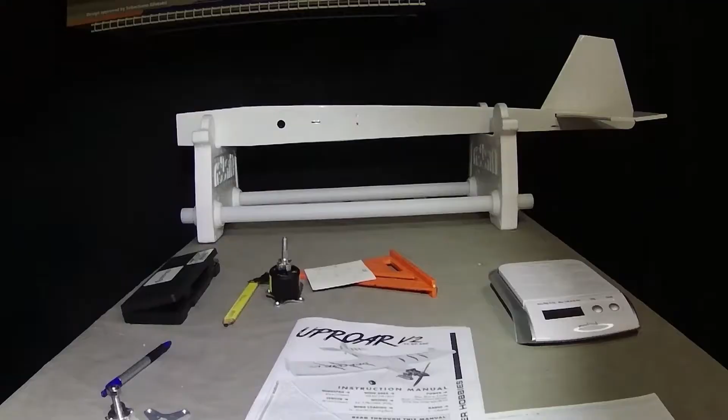Alrighty there guys, it is time to install the brushless motor for our Uproar version 2.

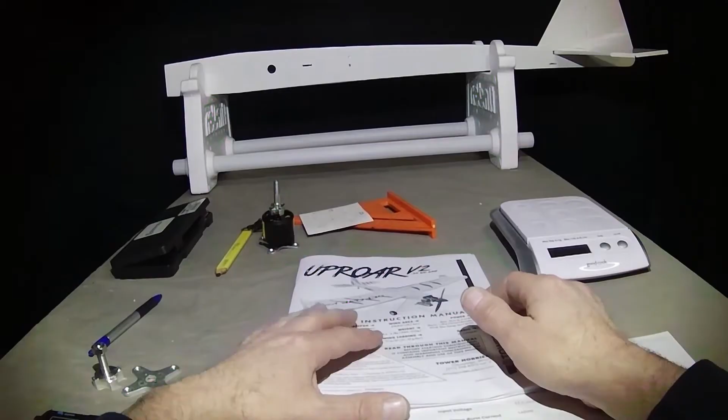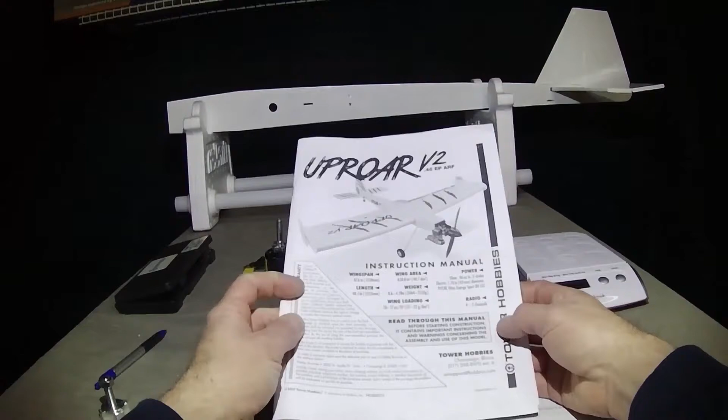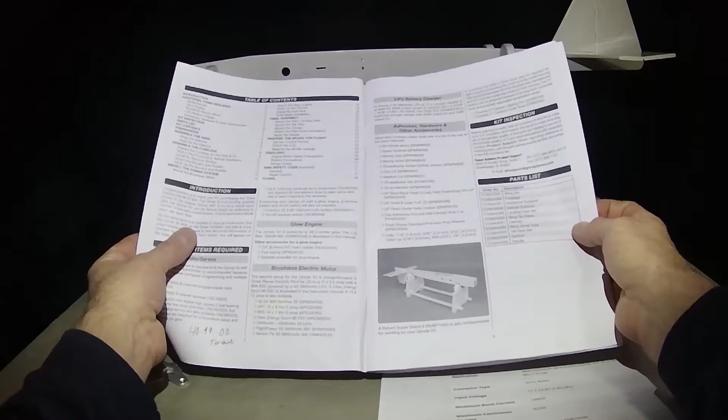Now, to help you guys select your brushless motor, this is how I did it my very first time. I was clueless, I didn't know what to do. I spent who knows how long trying to figure things out. In the manual, it'll give you a recommendation, and of course they're going to recommend their own product, and it's most likely going to cost more money than what it really should, unless that's just what you want to do. But they recommend this right here.

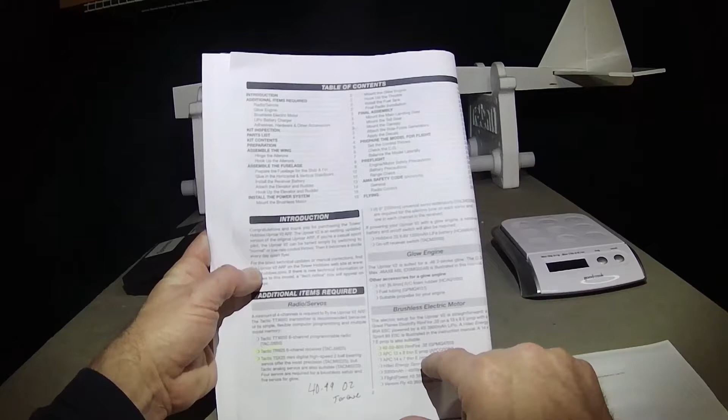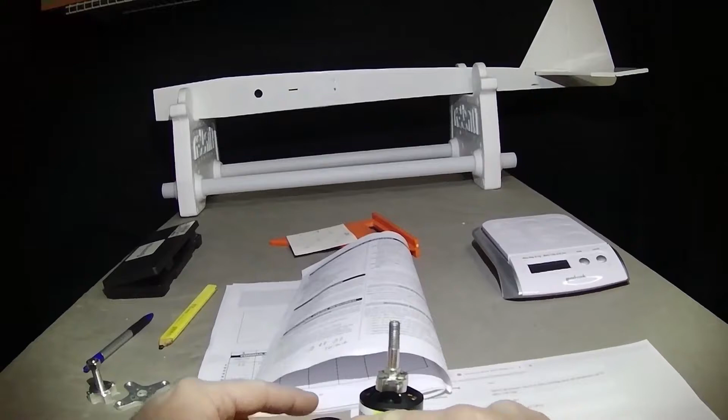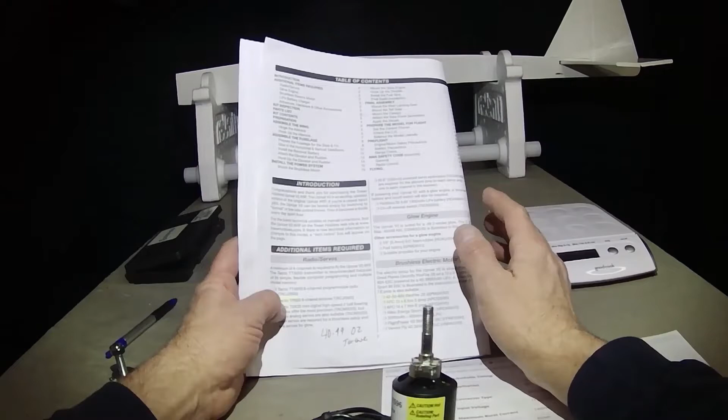A 4250 800 rimfire 0.32 brushless outrunner motor, and it gives a part number. The 4250 is the size of the motor - that's 42 millimeters wide and 50 millimeters tall. So whenever you hear somebody say they have a 3240 or a 4020 or whatever, a 5050, they're talking about the size of the motor.

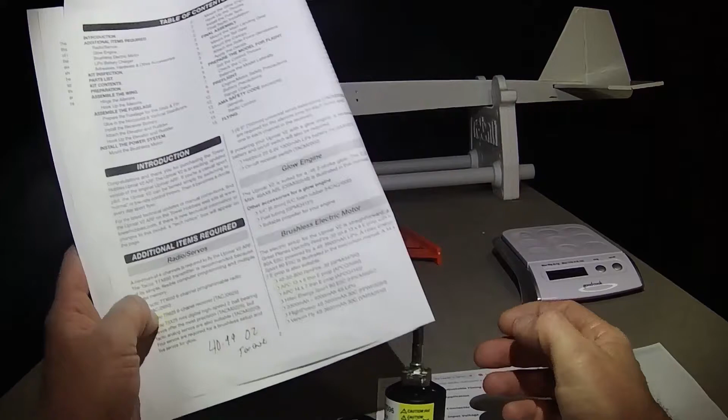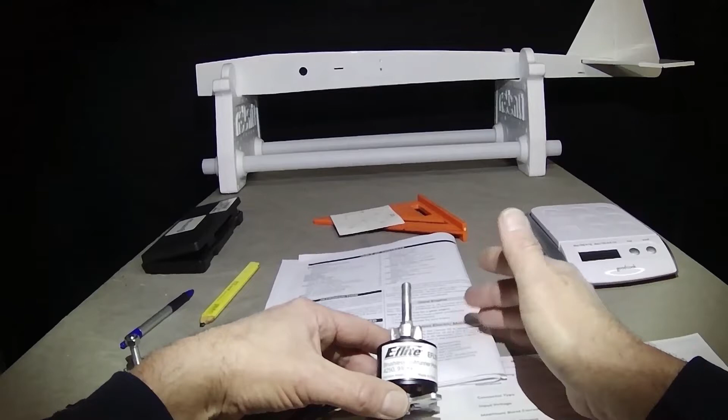So 4250 800 kV, that stands for RPMs per volt. The exact mathematical formula I couldn't tell you, but for simple terms let's just call it 800 RPMs, and they recommend a 4S battery, which is 14.8 volts. So you could multiply the 14.8 by the 800 and come up with this. Or if you're going to use a 3S battery at 11.1 volts, you could do the 11.1 times the 800. But that's not the exact formula, it can give you an idea how fast the propeller will spin on what battery. Obviously, the bigger battery, it'll spin faster.

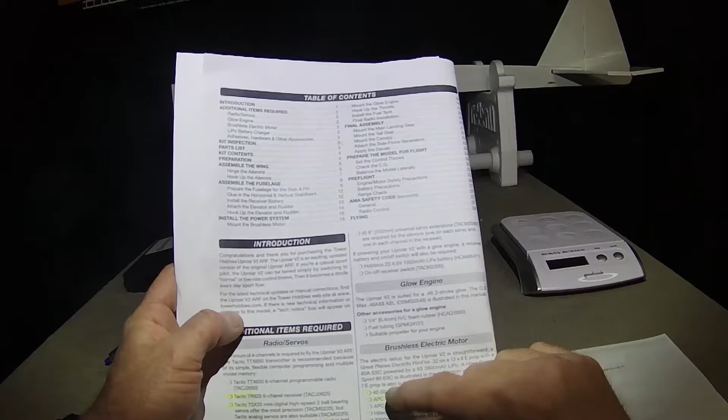So they recommend 4250 800, and they also call that a 0.32 size. I'm not all that familiar with engines that ran on nitro or glow, but the size engine would be, you know, they had a 30 size or a 40 size or a 60 size engine. So this motor is equivalent to a 0.32 size glow engine.

And then they recommend a 13 by 8 propeller to a 14 by 7. If you were using the 11.1 volt battery, you would go with the bigger propeller, because if you use the 4S battery, it's going to spin much faster, so you would go down a size in propeller.

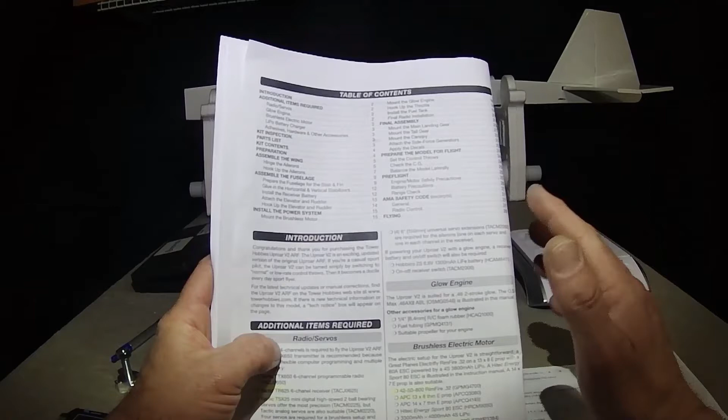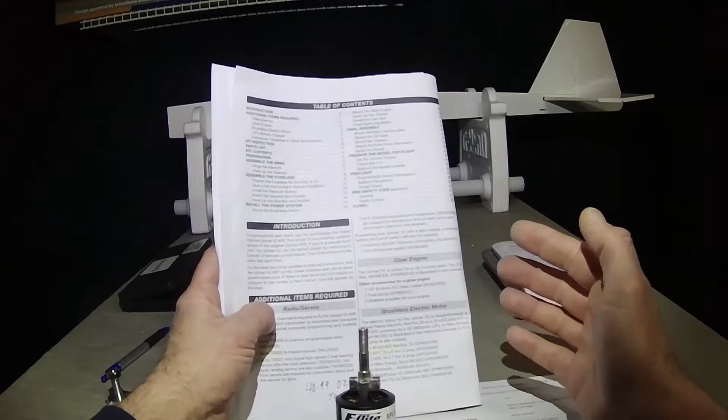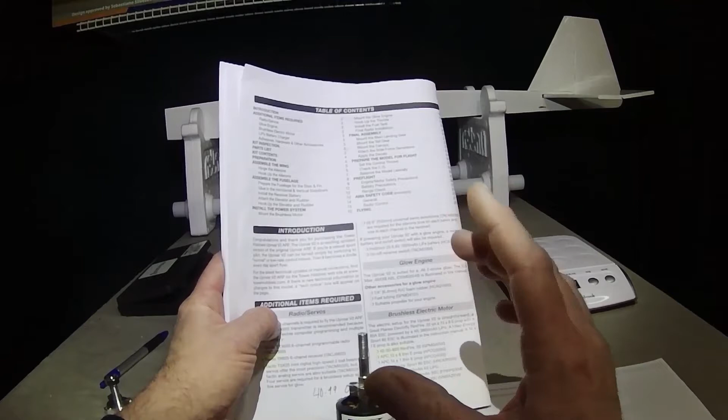You got to kind of think of tires on a car or your bicycle or lawnmower, whatever, how fast they're turning. If you're going 2 miles an hour, is the wheel just turning like this? And the faster you're going, you got to kind of think about your power in that rate. If you have a 3S battery spinning the propeller this big, and then you put a 4S battery, the 14.8 volt, it spins so much faster, it doesn't need to spin that big of a propeller still - it can go down a size of the propeller and still have more. It might take you a little bit to kind of learn all that. It did me too.

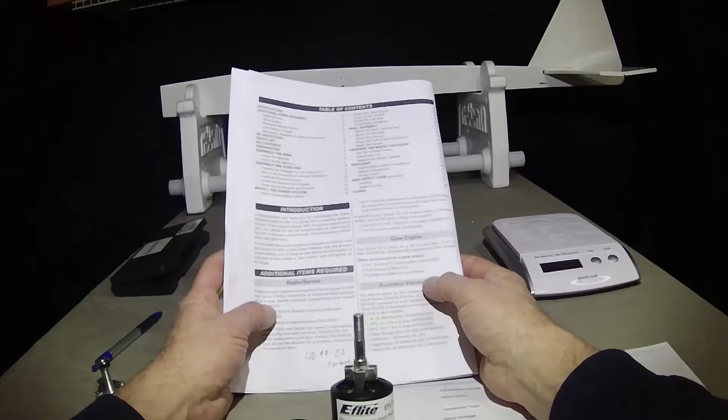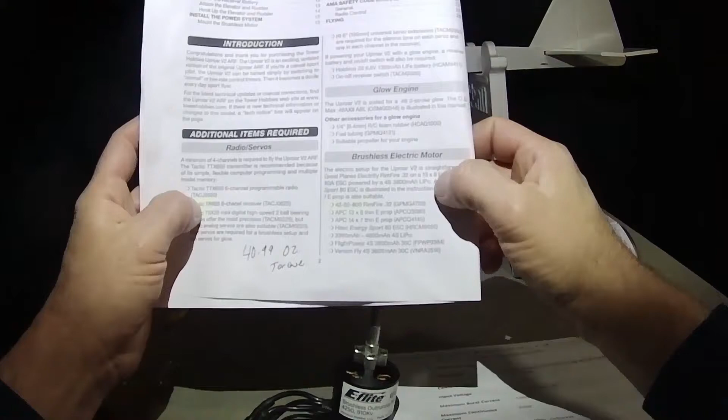It doesn't make sense to go that way, but if you go with the bigger battery, go down a size in a propeller. So that's what they recommend, 4250, 800. So what is that? Well, then you can go to a website and you can try to find that motor.

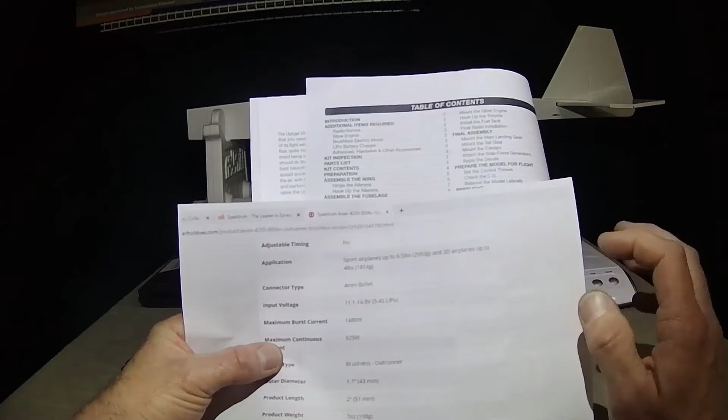And that'll teach you the size if you didn't just catch it right now. But you can see here, product length, 51 millimeters. Product diameter, 43 millimeters. Remember, they said 4250. So they rounded down by 1 millimeter in the instruction manual. And that's common. This is a 4250, and it's probably 39 by 49 or something.

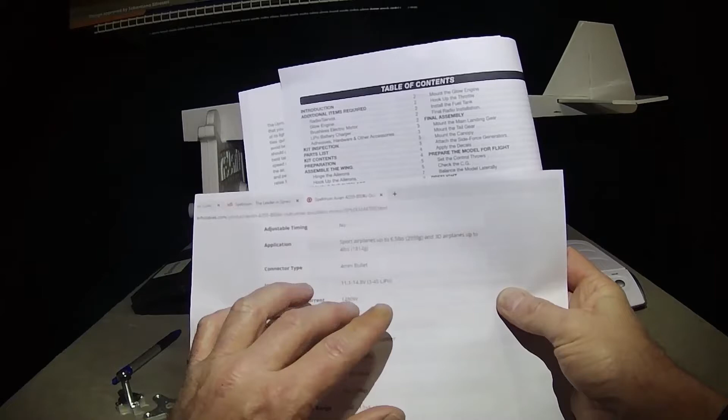And to give you an idea of how much the motor weighs, they're claiming it weighs 7 ounces. And if you want to figure out your watts and your max burst and your max voltage, you can use 11.1 to 14.8. It tells you what size connector goes on the wire, 4 millimeter bullet. When you're plugging your batteries up, you can think about the thickness of the wire.

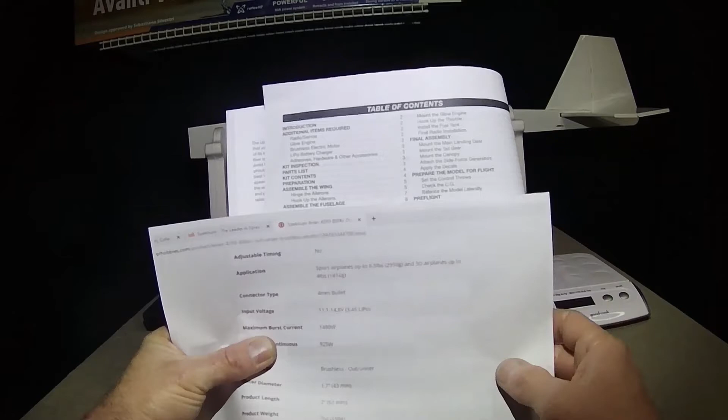And then the most important part here is it says the application: sport airplanes up to 6.5 pounds, 3D airplanes up to 4 pounds. So now that gives you an idea what this motor is capable of doing. The motor they recommended is this size, weighs this much, and is capable of flying a sport plane up to 6.5 pounds, or a 3D plane of 4 pounds. So now you have an idea what to shop for.

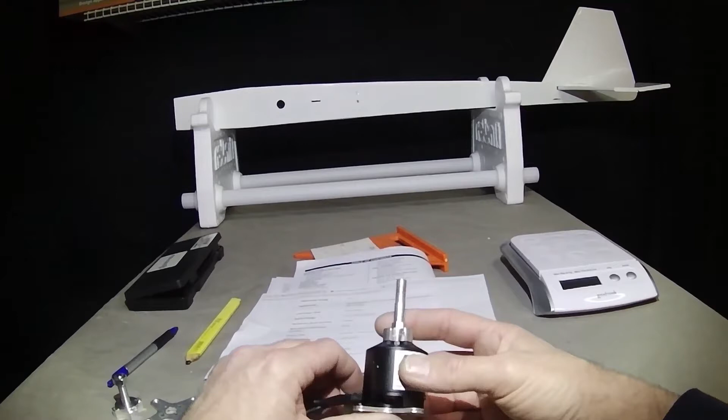I always talk about my 3D planes, and that's because I've had a few, so I end up with extra pieces. And this is a motor I've rebuilt, I replaced the bearings in it, so it's as good as new. It happens to be a 4250, but a 910 kV, so this motor is going to spin faster than the one recommended.

So what do you do when it's spinning faster? With voltage or by the kV of the motor, put a smaller propeller on it and get it down to where you need it to be. Well, they said their product weighs 7 ounces. So now we're shopping for a motor, right? Let's weigh this one and see what we come up with.

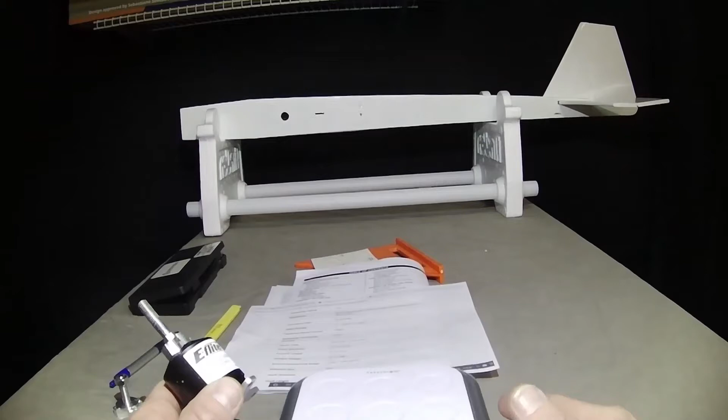Now this one's got the prop adapter, 4 bolts holding it on. It has the cross motor mount and 4 screws holding it on. So you got to take that out of this equation in your head. I'm going to hit the right button.

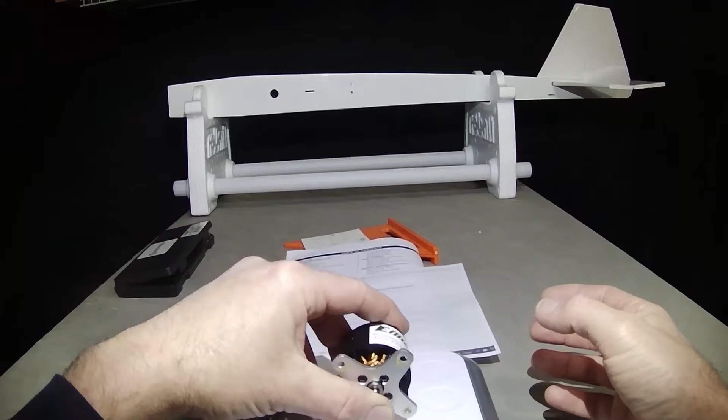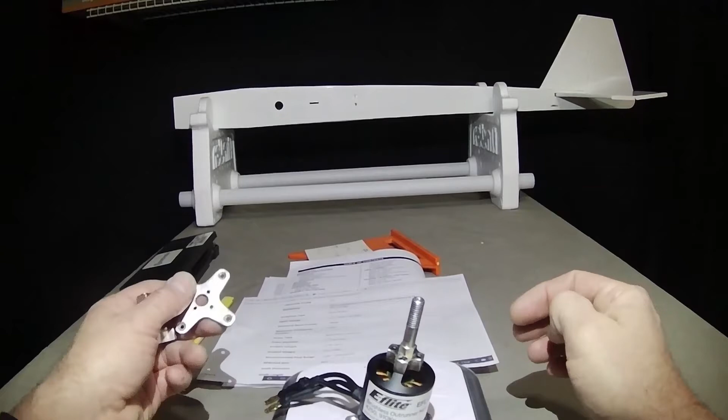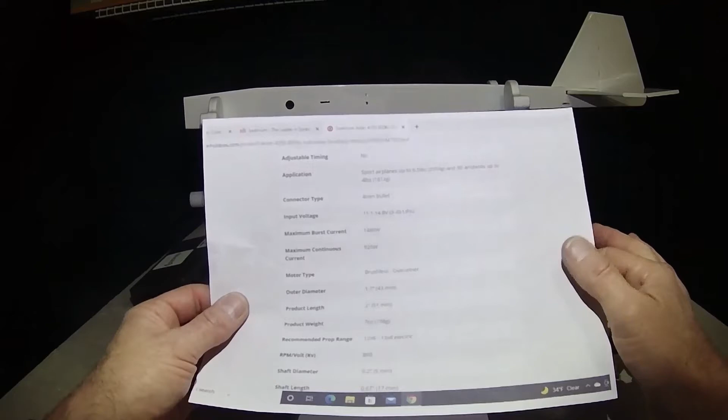9.7 ounces minus all this stuff. And here is a prop adapter and a mount, and that's 1 ounce. So we had 9.7 minus the 1 in my hand takes it to 8.7. These 8 screws are probably the 0.7. So our setup may weigh 1 ounce more. No big deal, we're within reason.

If the motor you chose or what you're shopping for came out to be 5 ounces heavier, then it's way too big. Or if it was 3 ounces light, it's way too small. So that can kind of give you an idea how you go about selecting a motor and shopping for it. Well, now that we got that out of the way, let's mount this thing and see how we do it.

All right, mounting the cross mount to the front of the plane. In the directions, it says to drill out the crosses they have right here.

Well, these are for the motor that they recommend, okay? So make sure the cross mount you are using either fits what they already have marked, or you need to make some new marks. The one we're using does not match those, so we're going to scribe a few lines in it and then figure out the center point for our cross.

The cross mounts, or the X marks the spots that they provided. If you bought their motor and their motor mount, they are centered. The mount we're using, the holes are just a little farther apart.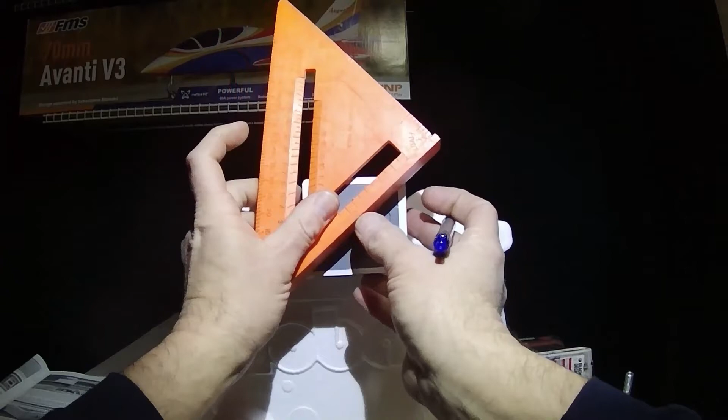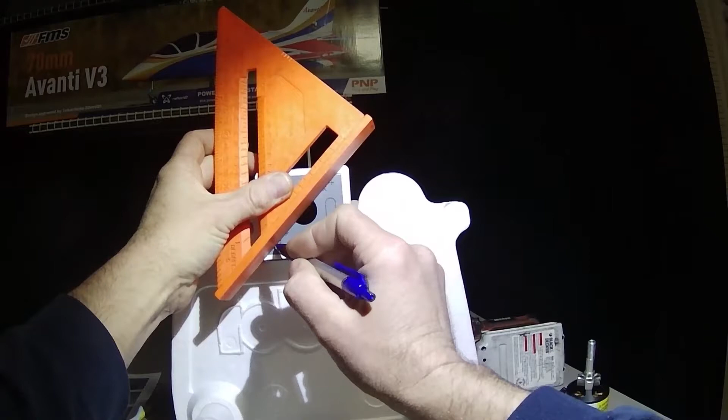So take a straight edge of some sort and a pen and try to make a line going right down. I might have to do this again off camera. Can you guys see that right there?

The mark they gave us is right here for electric. This one up top and this one up top is for the glow engine. And I think this one was for throttle linkage if you were using a glow engine, because you'd have a servo and a push rod coming out for the motor. But these inside holes are for the electric, and the bigger ones are for a glow.

We've only done one line so far, but maybe you can see how right there is where their X was, and then ours will go up. So we'll make another mark.

I'm trying to line it right up on what they got there. Concentrate, and you can see now we have a bigger X that we can try to look for our ink marker right through the center here. And then that'll center our markup. I'm just going to verify all this.

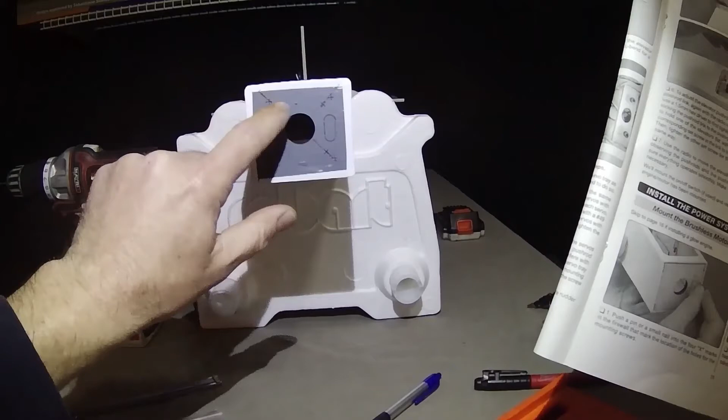I'll be right back. All right, off camera real quick, I fixed my light. I made sure these lines were perfectly straight and darkened them up a little bit. It was just a little easier without the camera dangling around my neck.

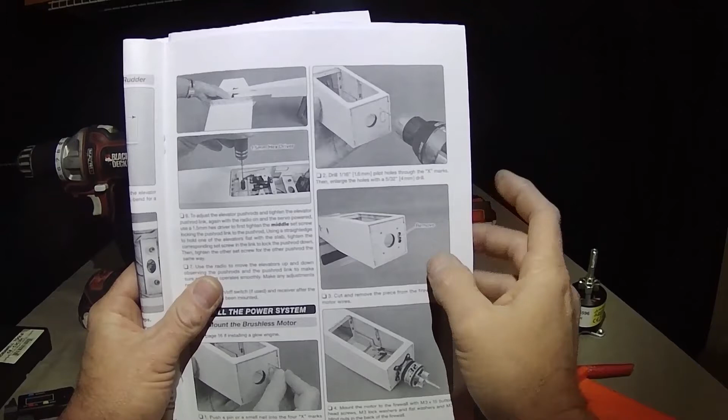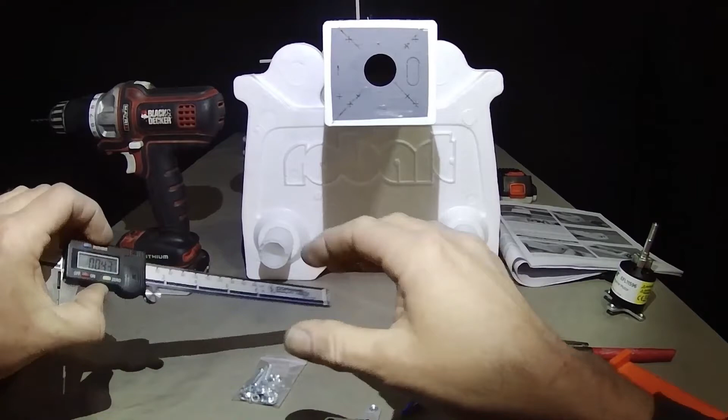In the instructions it says to drill the first hole, a 1/16 inch pilot hole through the X mark, then enlarge the hole to 5/32, because that's the size of the bolts they supplied. Now, drill bits do have the size stamped on them. You're going to need a magnifying glass or fantastic vision, normally right down the side, depending on the bit, but they will be stamped on there somewhere. Or if you have a micrometer, you can measure the bolt you're dealing with, and then try to match up a drill bit that way.

These micrometers aren't accurate unless you want to spend $1,000 on them. I mean, they'll be accurate to the hair, put it that way. But the bolt measures about 155, and it's accurate there. If we did it again, it wouldn't read right. So anyways, that's how you can select a drill bit if you can't read the writing that's stamped on there.

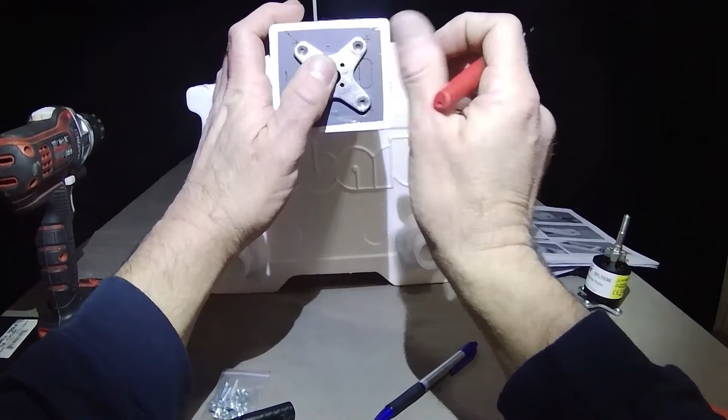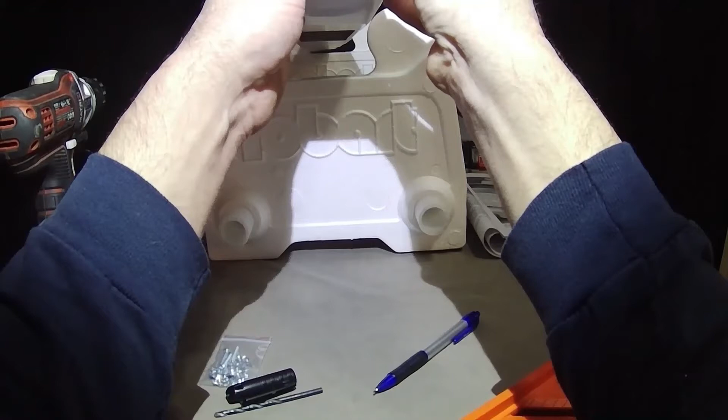In this particular situation, it really doesn't matter what kind of bit you get. Some will say steel or wood, and you can use one for metal or one for wood through here. I've got the smaller one already in the drill. The next thing we're going to do is line our X mount up on these crosses we made, so the holes where the bolt is going to go, or the lines we drew, if we get those centered through all 4 holes, will be centered.

Hold it there. I'm going to put a dot through it. Got it. Dot, dot, dot, and dot. And that's where our first hole is going to go.

And you start off slow. That's why you're using a smaller bit, in case you mess up, you can try to fix it. And even though our dot might not be directly on the line, that's because when I was sticking the marker through, it could be up or down. Try to get the bit on the line.

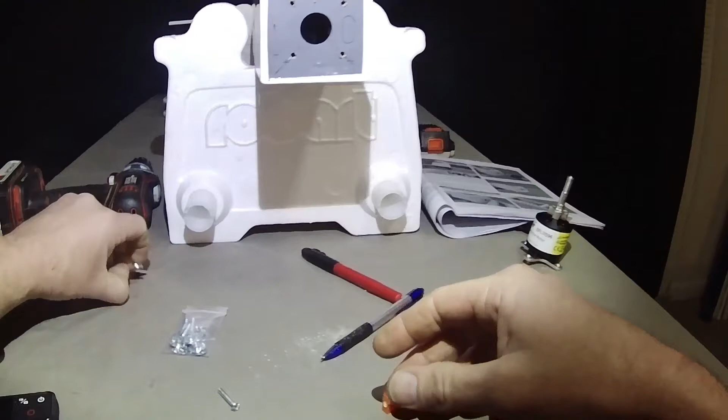There's that one. That one. So we've changed bits, we're on hole number 2. Knock these burrs off so we can... I hope you guys can see that.

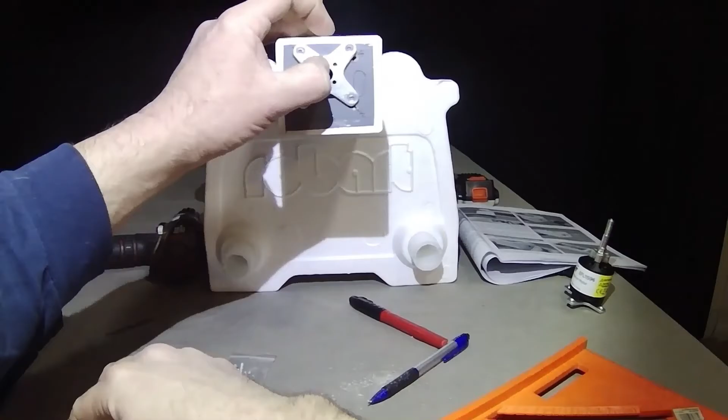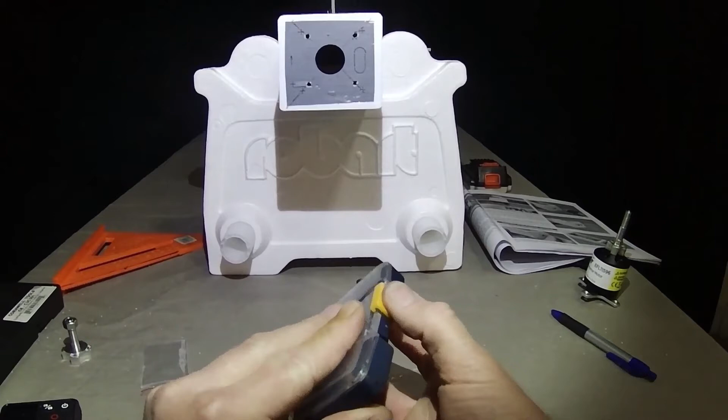All right, holes are drilled. Bit is going back in its case. That's the hardest habit to get back into, putting those away. Very, very, very hard. All right, let's dry fit this thing real quick. Got the screws going through it.

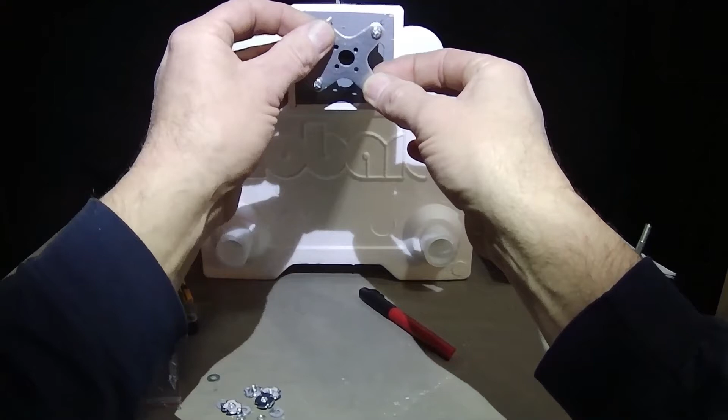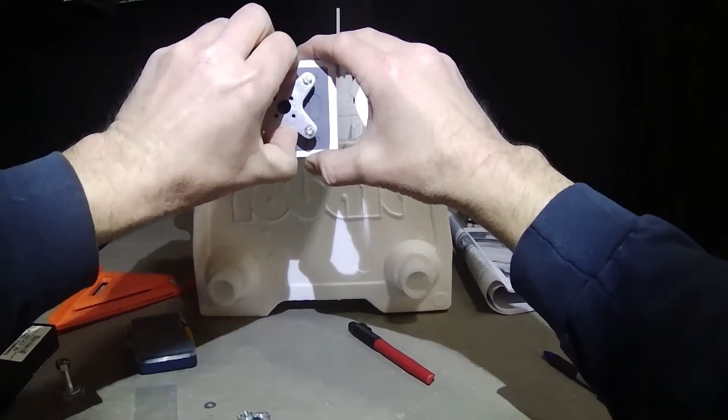Just like it's made for it. Now, some of these mounts are made for tapered screws, see how that's concaved in there? If you're going to use a screw that's not concaved, you might need to make these holes a little bit bigger, or go get a screw with a concave head.

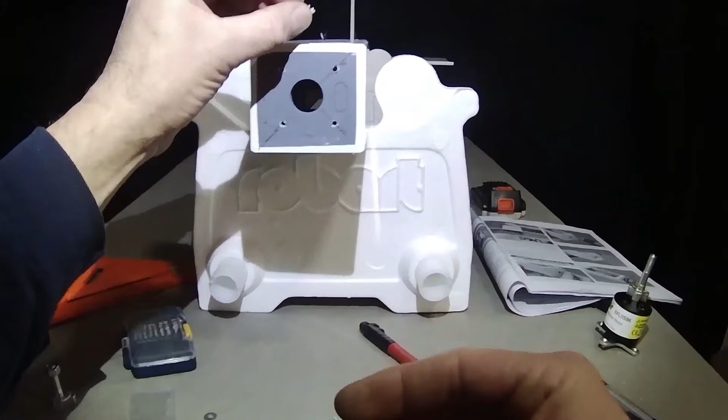These are the nuts, and hopefully you can see how they've got those spikes on the back side. These spikes will lock in, so you can turn the screw from out here and won't have to hold them on the back side. As you tighten them up, it pulls them in. We'll do that real quick just to dry fit them. Let me get it ready.

And get it started. So I got it started there. Go on, tighten it up with your fingers if you want, that's what I'm doing. And you'll notice it's starting to get tight right there. Okay, so it's getting tight. And now I've got a screwdriver on the other side, and I'm still holding it with my finger a little bit until it starts to bite in.

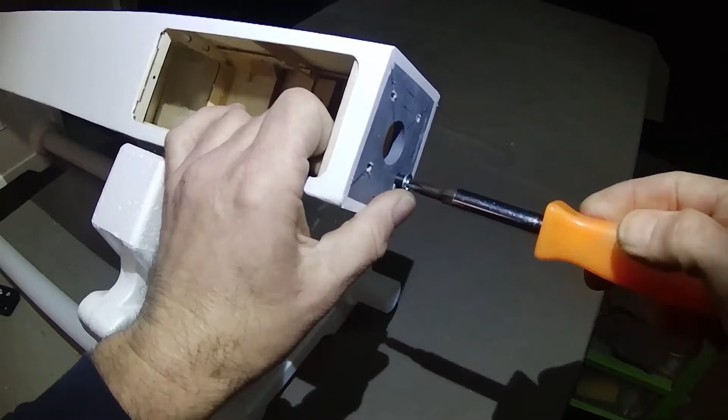And put a washer on the other side, because the washer I picked wasn't quite big enough and it was starting to go in the wood, and we don't want that. So now we'll try it this way. Yeah, I shouldn't have done that. I should have done this setup right here first, but it's okay.

We'll check it out here. Yep, because of that washer I put, it's not damaging the wood. And the blind nut is digging itself in there, and it's almost flush.

And I kind of felt it stop right there, and that's a good place to stop. When you go ahead and put the motor on, then you can cinch it down a little bit more. And when we mount the motor, we might put a little glue right there just to hold it in, a little insurance policy.

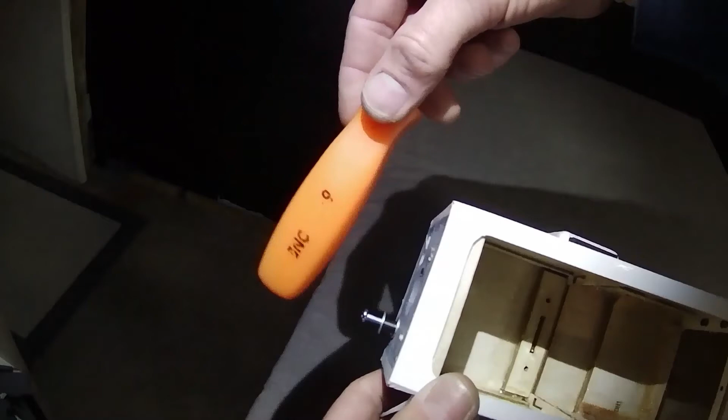So I unscrewed it a little bit, and unscrew it until it's almost out, and then you can give it a tap and see it pushed it away. So now we just need to get it out of there, and not a whole lot of room to work, but we're making do. There it is. Now it's out.

And then I've got a Dremel tool, and I'm just going to try to sand that little spot just a little bit, just where that epoxy was, up on its high side. Watch my eyes there. Maybe a hair more.

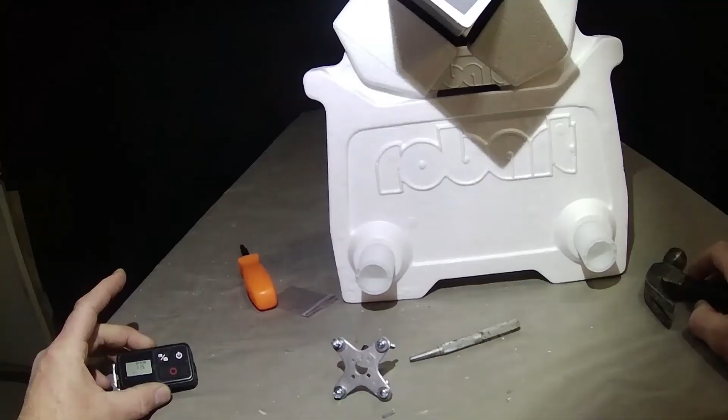And we're going to call that one good. All right. Trying to make sure you guys can see that real good. All right, sweet. All right, we got all four in. I finished the others off camera real quick.

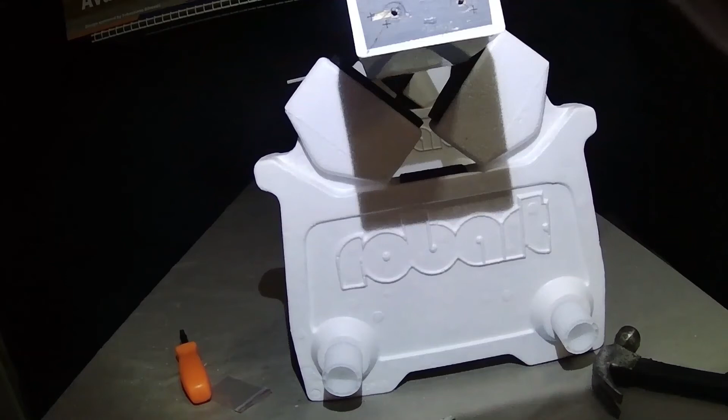It also says to knock this out right here for the wires of the motor. And you can see that that little punch out piece is not the whole thickness of the firewall. So we've already messed up a little bit of the wood here, which is just the nature of the business. So instead of pushing that piece up from the inside out and maybe taking a chance of taking more wood with it, just knock it in like that.

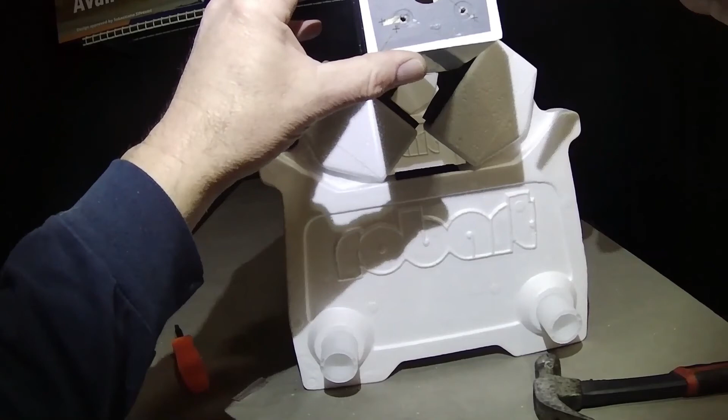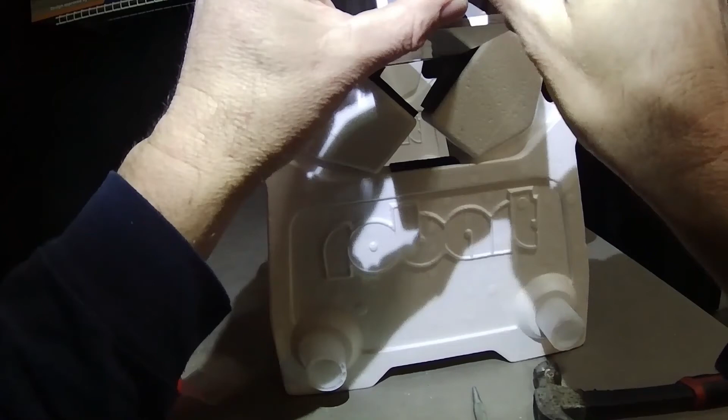So now we have room for our wires, and we'll just double check our mount here. Start all these loose, because these holes are not precise, not dead on accurate. So start them kind of loose, and then if one needs to tilt a little bit as they're getting tightened up, that can happen, and that's fine.

But we're just making sure they all go in. I mean, we still got to do the motor and all that stuff. But this way, it'll hold the blind nuts in the back of it for our next few steps of the build.

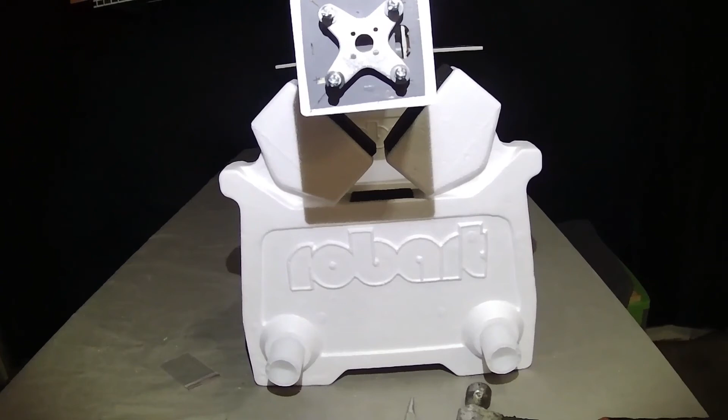And we have the holes drilled and... okay, the motor mount's mounted. So we'll see what comes up on the next part. Maybe we'll start putting in some servos or the landing gear. We'll just see what comes up.

I've thought about putting this style landing gear on there instead of the wire. So maybe we'll go about that. And if we do, we'll do that together.